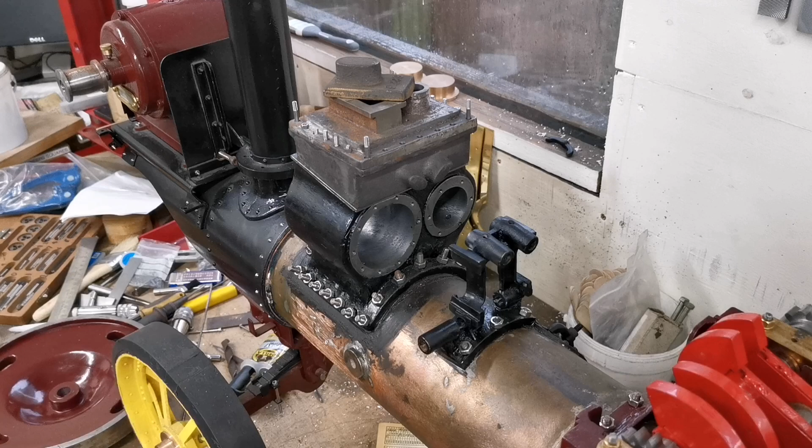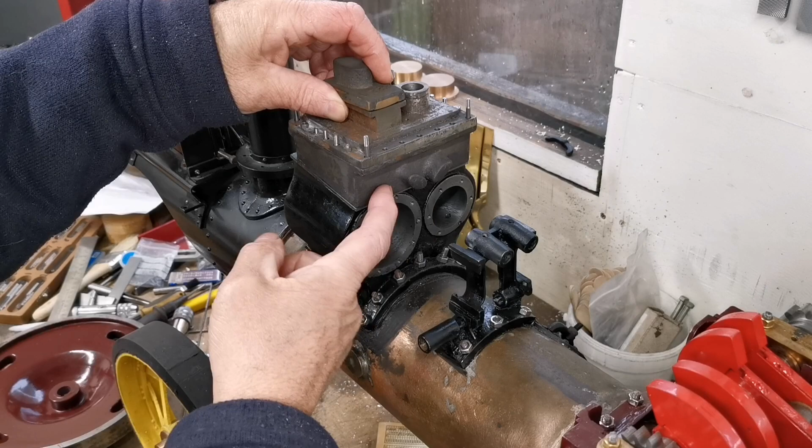So we're going to carry on now, do some work on the steam chest. The first thing I'm going to do is get this mounted in the milling machine with this face upright, so that these will be machined square to this face. Let's get that set up.

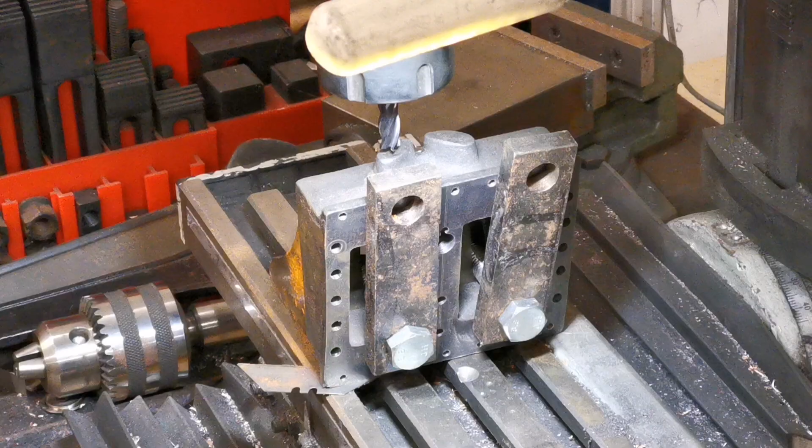Right, so I've got the steam chest clamped onto the milling machine with this back face square, which will be against the valve plate. So then I'm machining these off just square with the back. Let's get that going.

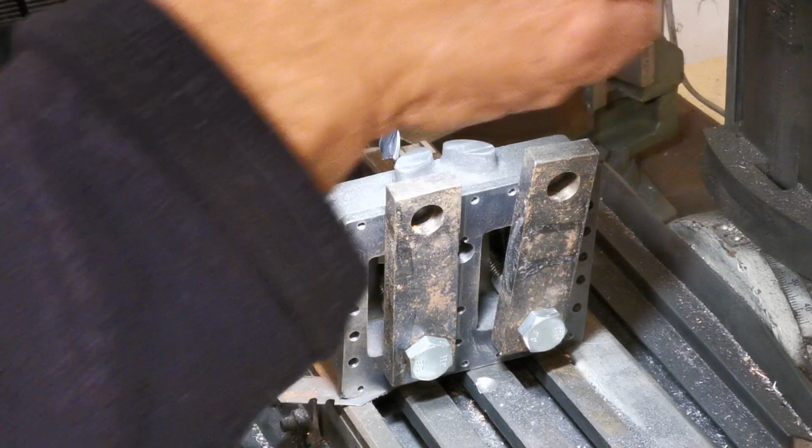Right, that's those two faces machined, and they're square now with the face that's against the valve plate.

Next thing we've got to do is mark out these two faces. On each one there's the hole for the valve slide rod that goes through there. There's a couple of studs, I think they're 5BA, and then there's a counter bore, which is for a stuffing gland. You stuff some stuff around the valve rod and then tighten up so you get a steam tight seal.

So let's mark these out.

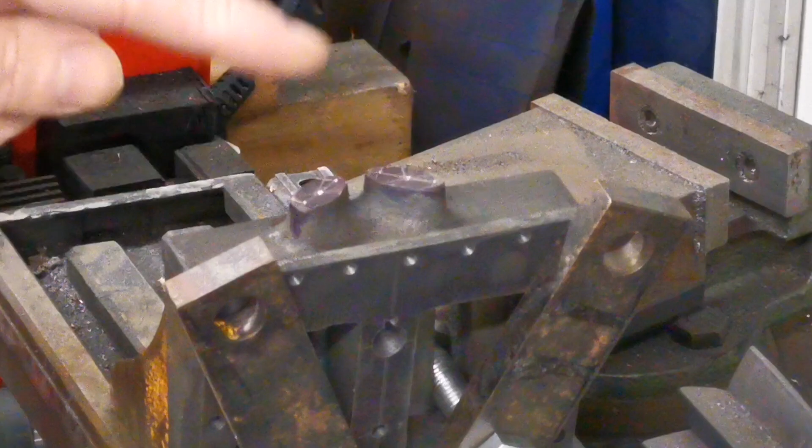Right, so I've got this all set back up in the milling machine, all marked out, ready to drill these holes. That's for the valve push rods and some BA studs.

Right, now I'll drill those 3/16ths.

Right, that's the tapping holes done. I just tap those out.

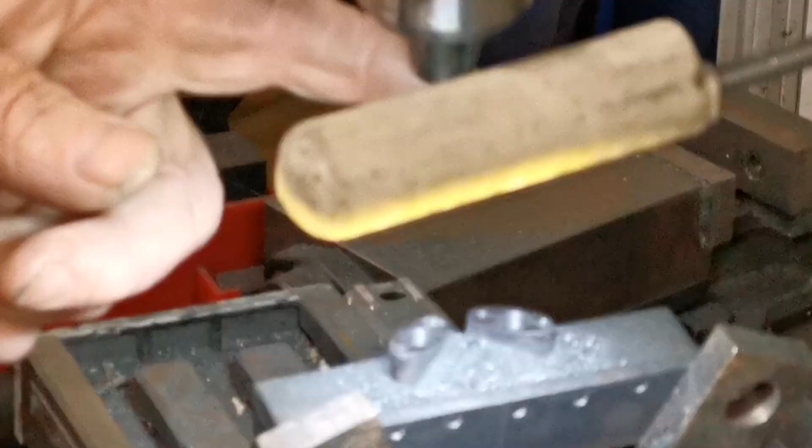Right, I'll just put the bottoming tap in.

Right, that's those drilled and tapped. The next thing we've got to do is turn this round and bolt it on the milling machine with this side upright, because this side and this face is square.

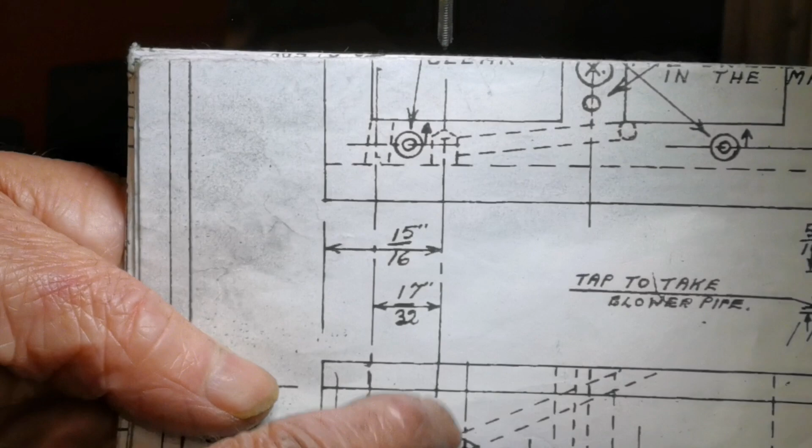Then what we got to do is machine this off a little bit flat, because when you look at the drawing, don't know if you can see that, there's some auxiliary valves, so we have to machine that a bit flat and then drill. There's a 3/16 hole through to the low pressure valve area, and then this one here is drilled about halfway through, as you can see there on the top part, and then it's drilled from this face here at an angle to meet up with that hole. And then 2 6BA studs there, that's for auxiliary valves.

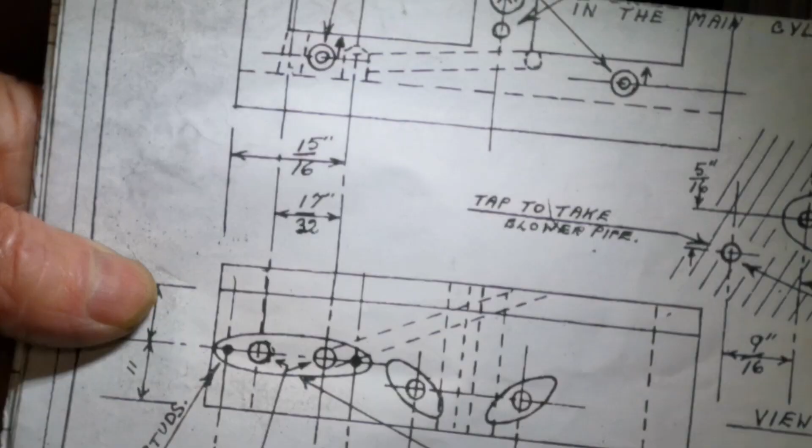So what I'll do is mount that now with that face upright, and then machine this face flat. I'll just set that up.

Right, so I'm just going to mill this flat a little bit. That one there.

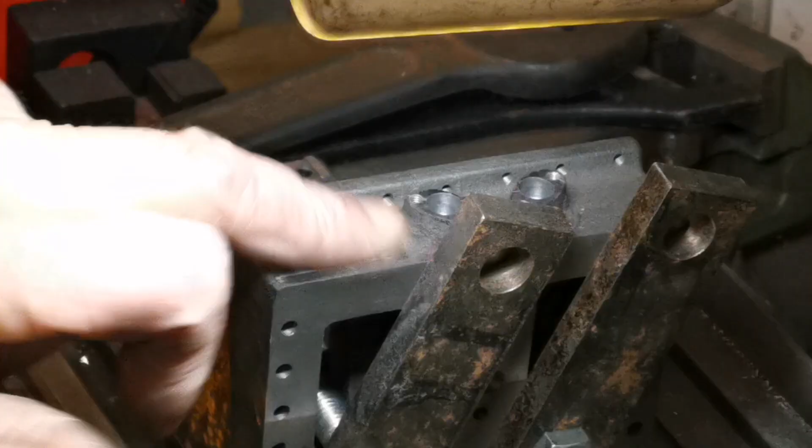Lovely. Right, what I'll now do is I'll just put some marker on there and mark out where I've got to drill the holes. So I'll get back to you.

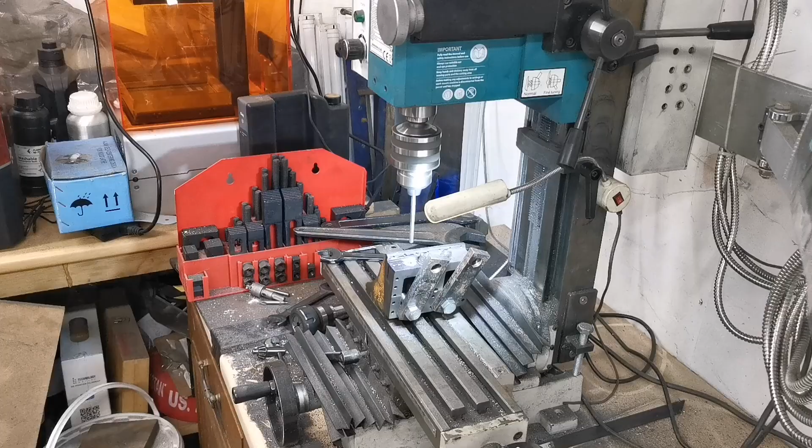Right, that's the first hole drilled to depth. I'm just shy of the bottom there so it doesn't come out that side.

What I'll drill next is the tapping holes for the 6BA studs. This hole here has got to be drilled at a slight angle to go in to there. So I'll do the square upright ones first, which would be the BA holes.

Right, that's the tapping drill size. What I'll do now, I'll just tap those two holes while it's still square. And then what I'll have to do is tilt that so that when I drill that hole, it will go at that angle to get into there.

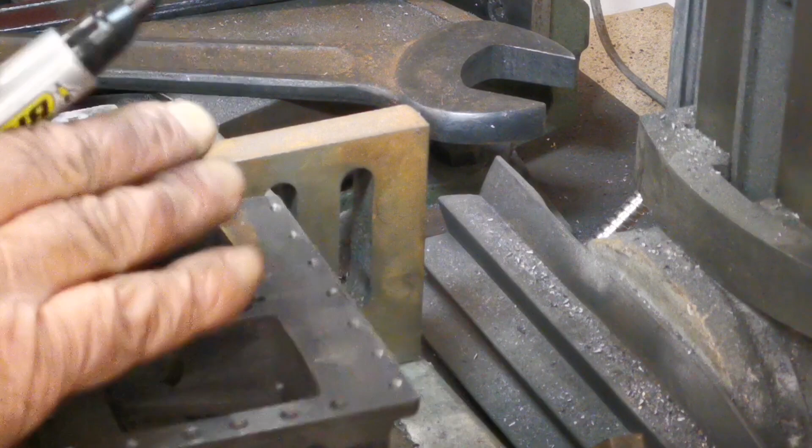Before I get my vice out, this is the top face, so the hole has got to go from here. This line here is the bottom of the hole I've drilled through there, and then that is the 3/16 hole there. So I have to drill this hole from there to meet that.

But also, when you turn it around the other side, I've got to mount it at that angle so it meets that from there. Bit tricky. Once I get it set up in the vise, you'll see. So that's not very straight, that line, but that gives you some idea where I've got to aim for, that way.

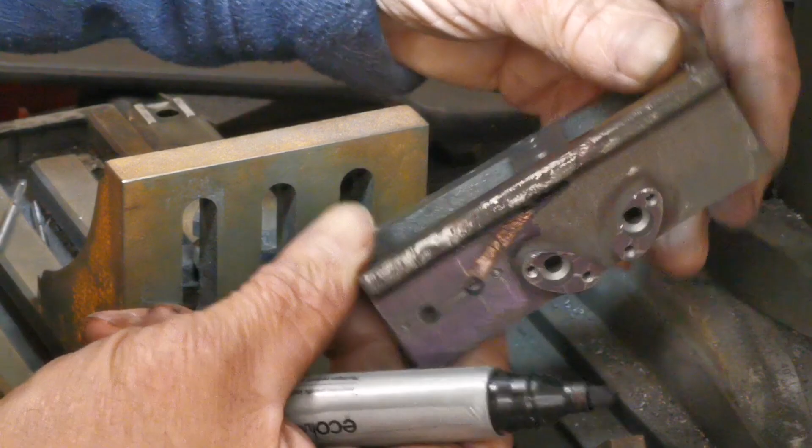And also slight angle from there to there. I suppose what I could do is drill that straight this way and then notch that little bit out there. Maybe I'll do that, because that'll still be a steamway, as the top then bolts on there. I'll go from there straight this way, but at an angle, and then notch that little bit out so it opens up into that steam chest area.

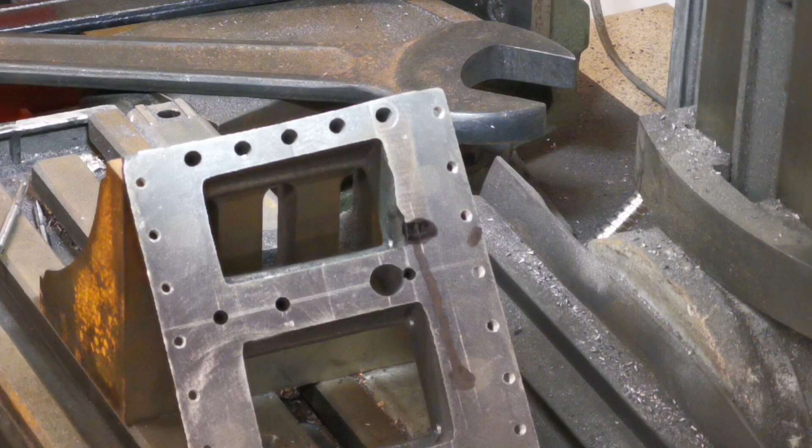Right, I'll just get this set up and then I'll be back with you. It'll take a little bit of time and a bit of jiggery pokery. Right, I've got this set up.

I've decided to go square this way and then just notch out that corner. This drill's not long enough to go right the way down to there, so I'm going to drill what I can with it, and then I've got a longer one. Obviously that's too long for me to get in there for the movement of the milling machine, so once I get down so far, I'll be swapping this.

So let's make a start. I have milled a flat in there, so it'd be easier for that drill than trying to drill on a slant. Just keep your fingers crossed.

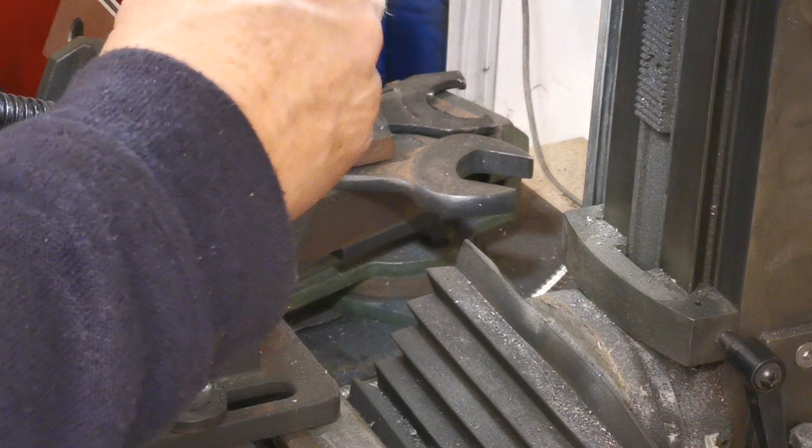Right, now I've got to swap the drill. This long drill, I haven't got the height to get it into the chuck, so what I'm going to end up doing now, because I reckon I haven't got much more to go, I'll finish that off by hand now. So I've just remounted the vice at a slightly different place so I can try and get this drilled carefully down to that hole there.

I think that may be it. Now what I'll do is just nip that out there, mount that back in there, and use the cutter and just swipe it across. Right, I'll just mill this out to this side so that the steam will come out of there and down that hole and out there.

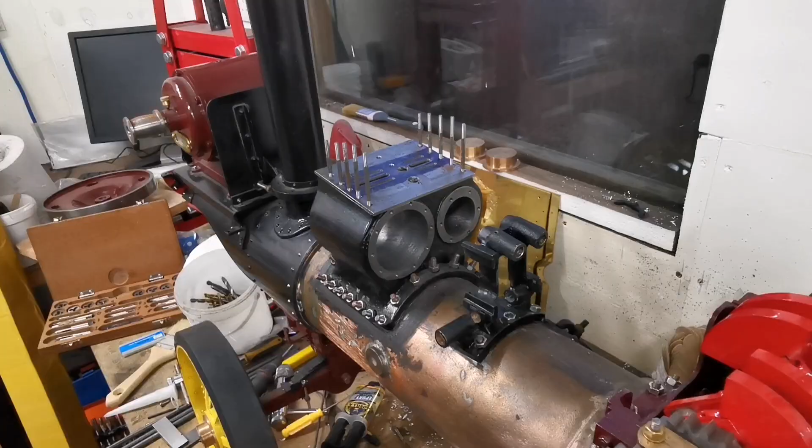Here we are. I think that was the easiest way to do that. Let's put that back on the cylinder block now. Right, so just drop that back on there.

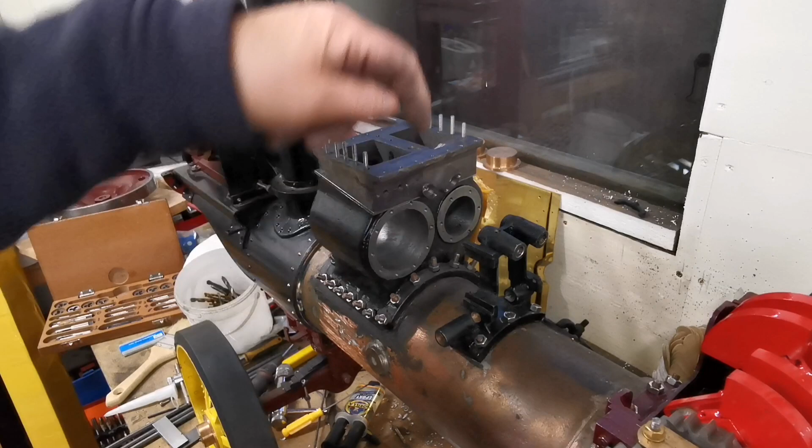So now we've got where the rods for the valve slides go, drilled and tapped, and the auxiliary steamways - this hole goes to the lower pressure, and this one you've got the steam coming from the higher pressure out this side. I'm happy how that's gone.

So then we can put the top on. We need to finish this now. This is literally finished now, bar a coat of paint. And then the top will go on. I think it goes on that way.

I think in the next video I'll be cleaning this up, machining that, and drilling this to fit on there. I think this is the safety valve. Right, on the next video I'll be working on this part and getting that fitted on there.